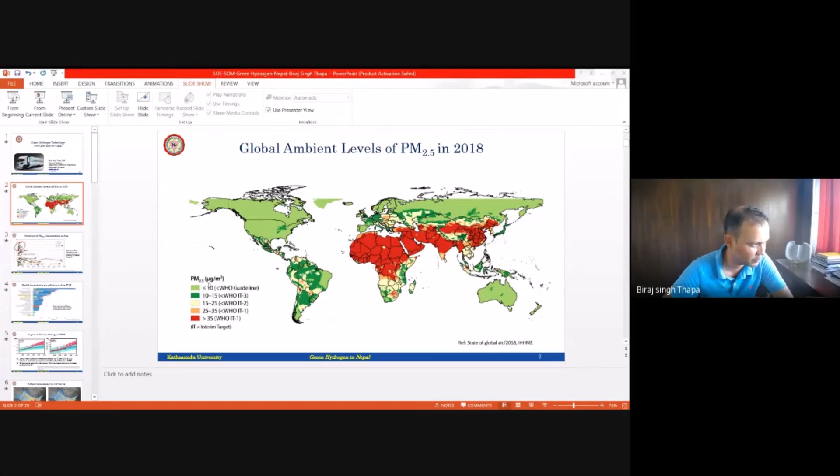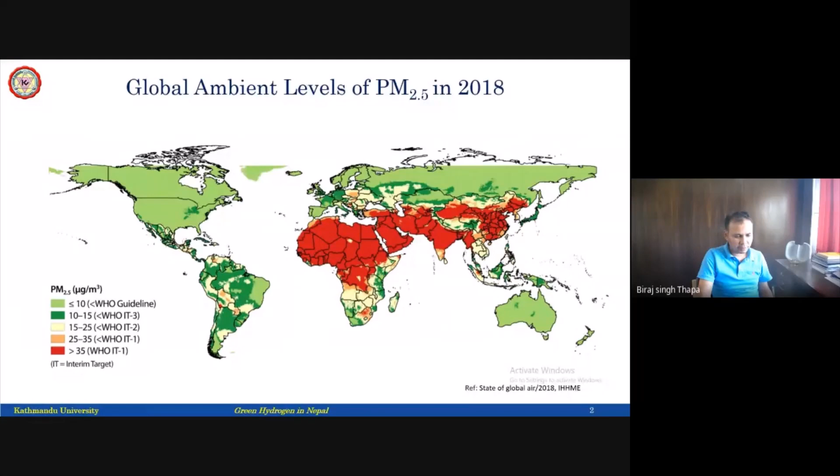That's what we want to dream of—fresh, clean air. If not for us, then the generation behind us should have green everywhere. That's why we see hydrogen as a future energy source, where we can see the entire globe green in this picture. That's the dream of my generation, to have everything in this picture green. That's why we call green hydrogen one of the sources.

We are neighbors, good neighbors, with so many things in common. We have very low GDP and very high particulate emissions. That is a really big challenge for our part of the world, producing bad energy. We produce quite high emissions compared to bigger or developed countries, and that's the reason we need to change the way we use energy, so our GDP can rise and our emissions can fall.

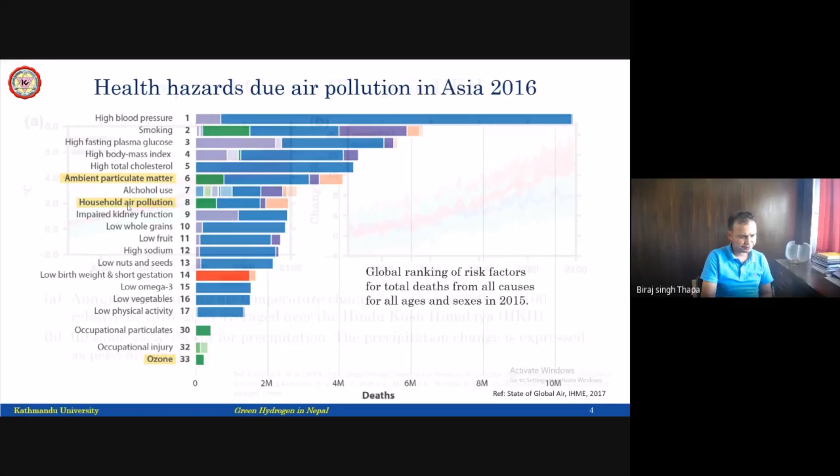This has brought quite a hazard in Asia. If you look at the reasons behind the deaths or mortalities, ambient particulate matter and household air pollution are quite high. So it reflects on our mortality, it reflects on our health system, and it also reflects on our climate.

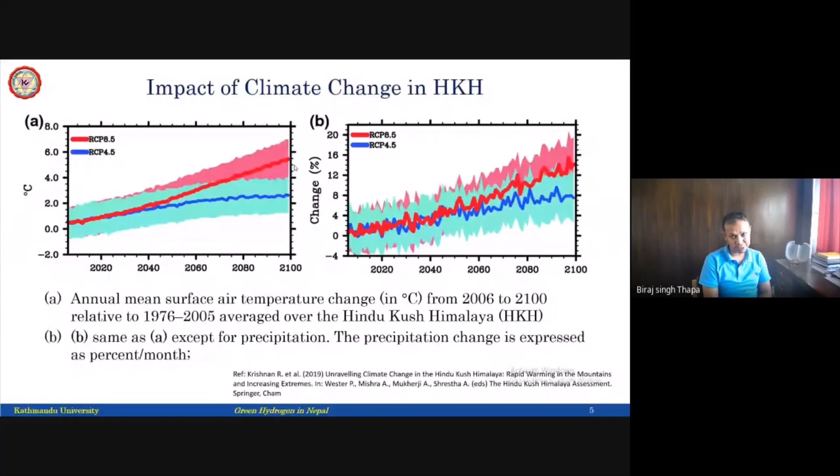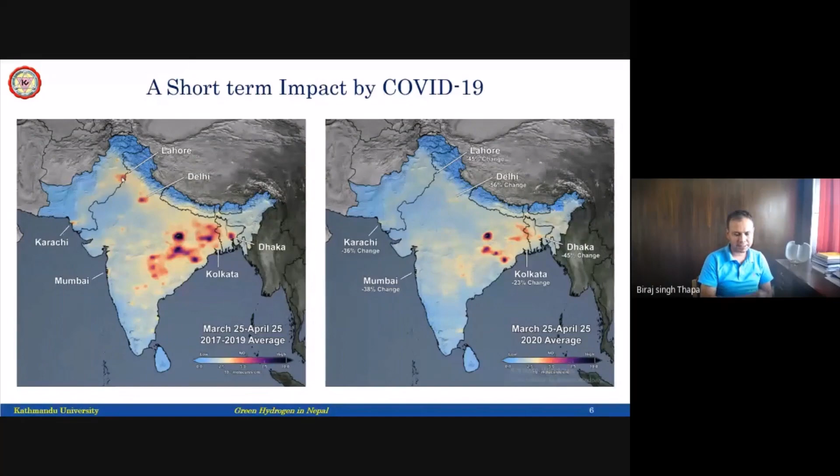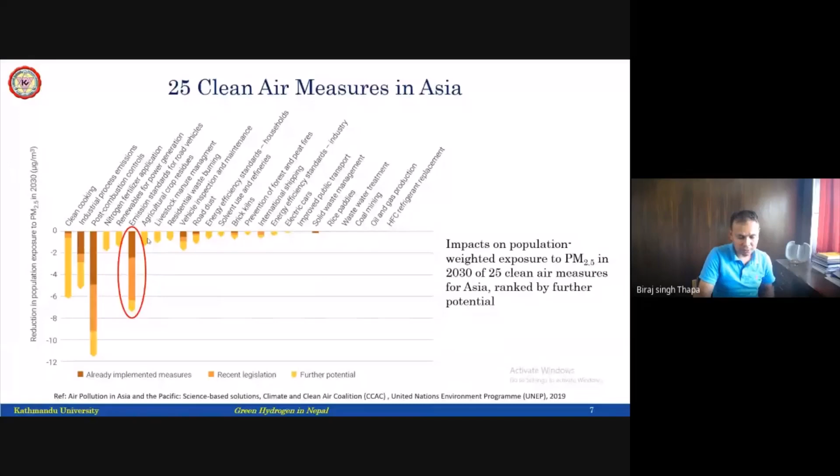And that is possible. In Nepal as of now, we can count the number of electric vehicles - that's 5 or 10, less than 50 on the roads. So if we change these patterns, the way we use road vehicles and produce emissions, that could have a very big impact on the environment, and of course reflects on climate change and other things.

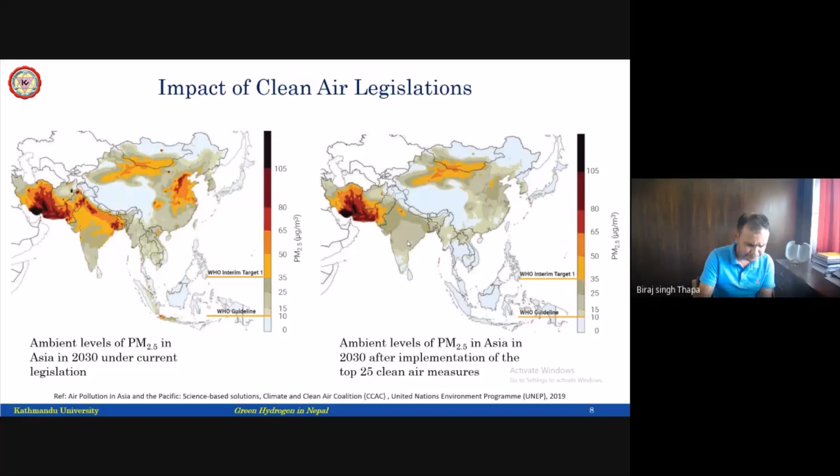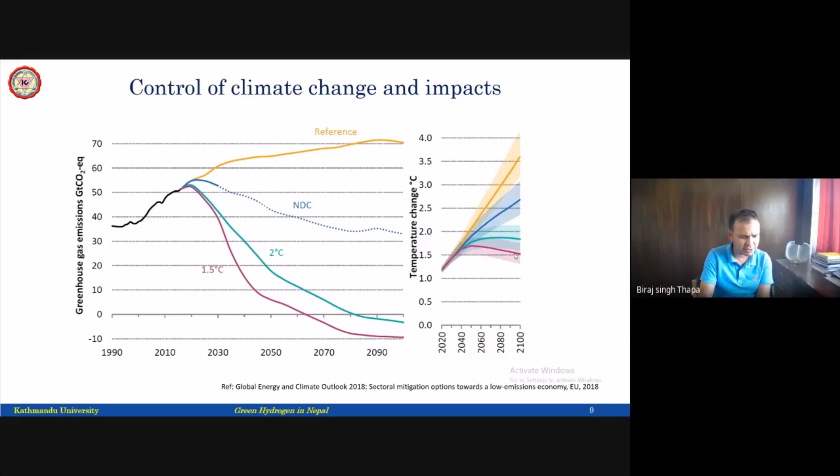All these patterns of climate change or control over climate change have been related to the energy patterns that we use. So many studies have been done - it is needed, it is necessary. It forecasts that if COVID does not impact this, the GDP is expected to rise quite sharply.

That means the purchasing capacity of each human being will increase. That means the amount of money we can use for purchasing energy could be higher than what we use right now, and that additional money for purchasing high quality energy for protecting the environment is possible because GDP is rising up. If you can buy high value clothes, we can buy high value fuels as well. There have been studies to see how this can be achieved - if we want to control temperatures below 2 degrees Celsius by 2100, this would be the energy mix. It's clear.

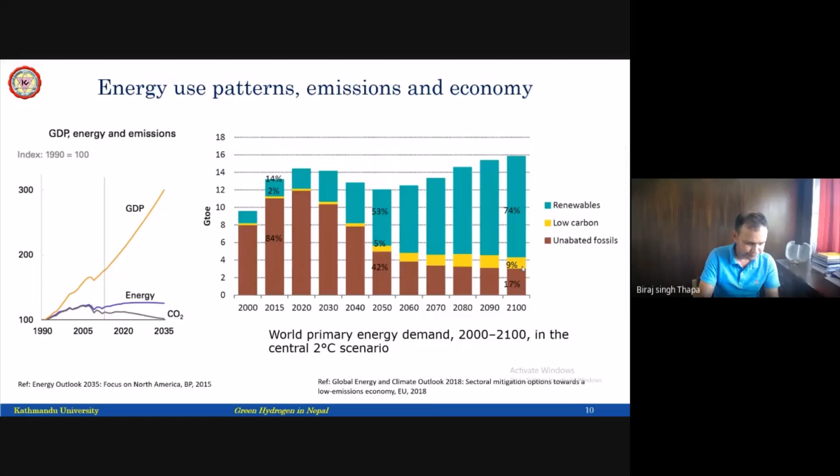And that's why we say green hydrogen can take up a big share of these renewables. So let me enter the second part: where do we find green hydrogen contributing towards a low carbon society?

Hydrogen is an energy carrier. This process was found by William Grove in 1838. It's quite an old technology. It's not rocket science at all. It's a very, very old and forgotten technology.

What we do is we just break water into hydrogen and oxygen ions by applying electricity. That's half the reaction, what we call electrolysis. Then we carry the hydrogen and put it back into the fuel cell, where it mixes with oxygen and produces water again. So it's just like breaking water into hydrogen, and producing water by combining with oxygen. Breaking water needs electricity, and producing water will produce electricity. So hydrogen is basically storing electrical energy in a very dense form.

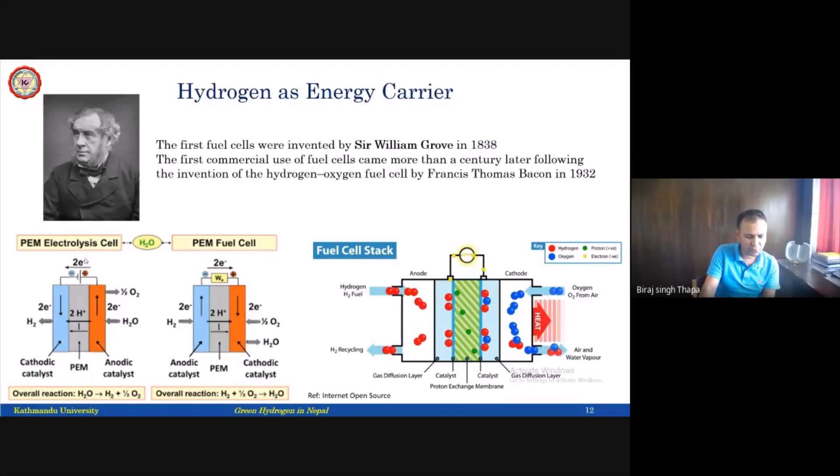So this is just a chemical reaction, it's all behind the chemical reaction. But the challenges are, how do we produce it efficiently? How do we store it efficiently? That has been our recent challenge, but it's an old technology.

As of now, it's of course solar energy that produces hydrogen. It can be directly produced from heat by thermolysis, and mostly from mechanical energy by heat, or directly from fluid energy by hydraulic machines. We produce electricity, and electricity can be produced from solar panels, and we do electrolysis to produce hydrogen. Hydrogen can also be produced from biomass by pyrolysis and other methods, and also from photolysis—there are several pathways. I think for Nepal, hydrogen production through electricity, maybe from solar or from hydropower, can be a sustainable path.

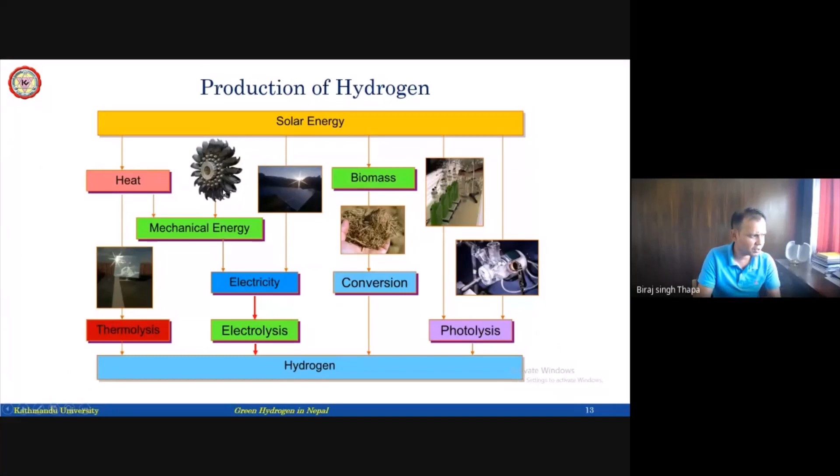There are a lot of technical aspects, though it was developed a long time ago. This is a kind of block diagram—I don't want to bring you into the technical aspects, but there are so many steps. We need to produce electricity first, then we need to break water into hydrogen and oxygen.

We need to store it, we need to transfer it, and we need to put it back again into the fuel cells to produce electricity again. So that's a very complicated process with overall efficiency issues. The total average efficiency for the whole cycle is not more than 60%. There is a lot of research being conducted, aiming to cross 80% efficiency. But the argument is, if fossil fuel can run with 30% efficiency, why can't hydrogen run with 60% efficiency?

Storage is another problem—we need 300 bars, which is extremely high pressure, not a common pressure at all. So that's a challenge, how to store it at that high pressure. It's very light, it leaks, it is inflammable. We have safety issues, a lot of cost parameters around it, and the technology is not completely mature. So it's still under process, and the main problem is adaptability.

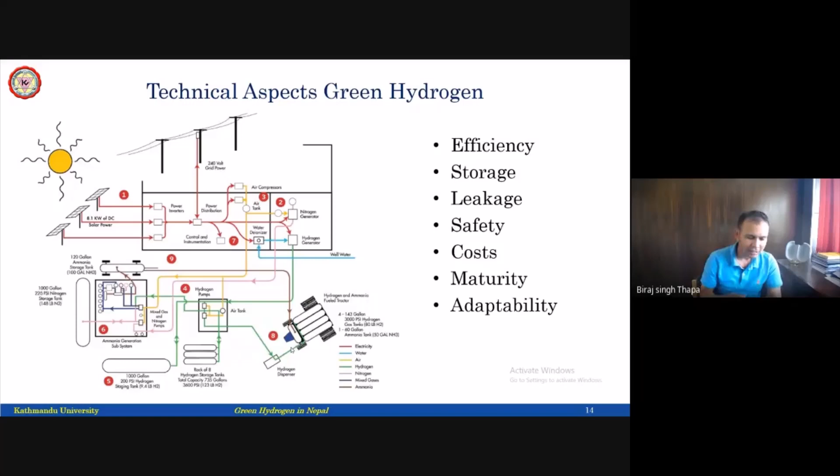Can we change our mindset from fossil fuels—what we call an easy fuel, even though it's dirty—to a clean fuel that is complicated and challenging? Maybe that's how the maturity of the society and the adaptability of this technology come hand in hand in the future. That's what we can expect.

And that's a huge thing when we compare vehicles, because carrying a battery means consuming more power. That's why we think in the future, small cars and small vehicles will still be battery-based electric vehicles. But for big buses, intercity transport, and trains, where batteries cannot drive them because of the low energy density, there is a very distinct gap where hydrogen can fuel it because of this high energy density.

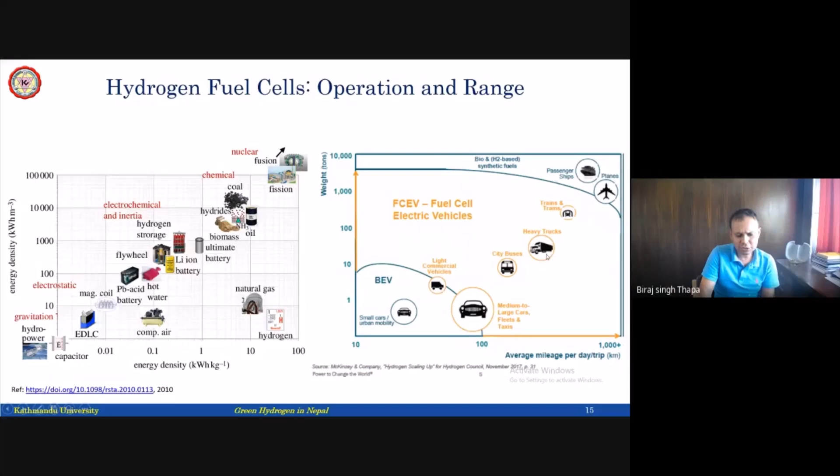We just need a few kilograms, 10 or 20 kilograms of hydrogen to drive from Kathmandu to, for example, Pokhara. That's quite high energy density. So that is the range where lots of research has been conducted, and that is where we can also focus in Nepal.

A lot of energy is consumed by city buses, trucks, and maybe in the future trains as well. If you look at the market right now in 2020, we have a very classical market for hydrogen. It's just a feedstock, meaning industries producing fertilizers or chemicals, only that.

So only the small scale or industrial scale hydrogen has demand, but it is changing. Lots of new industrial sectors are coming up, for example power generation. Transportation will be the largest consumer of hydrogen. Right now it's almost zero, but in future, transportation will be a very big sector for hydrogen. We'll also have industrial energy coming from hydrogen, and building energy coming from hydrogen. The industrial scale uses like urea production and chemical processing plants will remain the same.

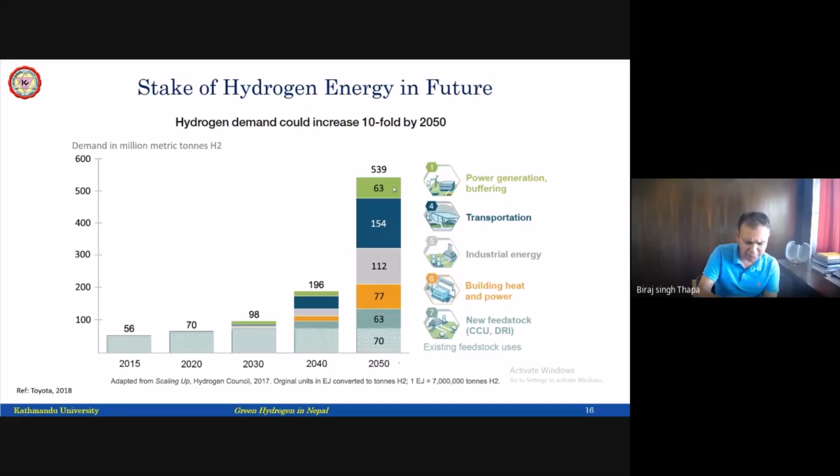So a lot of new things will happen. And if we bring hydrogen into the context of Nepal, all these things will start in Nepal as well. We will have a new ecosystem of transportation, and a new ecosystem for power generation and fueling. So that's the future. The entire world is moving towards hydrogen with this shift of society.

This year is very significant for hydrogen. We call 2020 the horizon, because from this year, the cost of hydrogen from renewables is entering the cost range of hydrogen produced from fossil fuels. Until now, even the cheapest hydrogen produced from renewable energy is still more expensive than fossil fuels. But from 2020-21, it will start to come down, even falling below. By year 2040, hydrogen produced from renewable energy will be cheaper than fossil fuels.

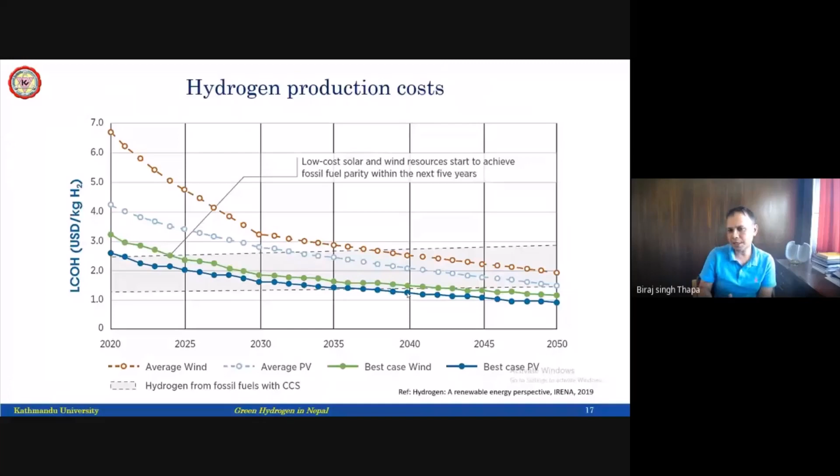And that is why we need that 10 or 20 year gap. We still have some time to prepare our society, because hydropower will remain for the next 200 years, for example. So if hydrogen becomes comparable to and cheaper than fossil fuels, this will definitely change the transportation sector, and definitely change the industrial sector. We need to start preparing from now in order to adopt this energy in the future. That's why we say this is the right time to discuss, the right time to start.

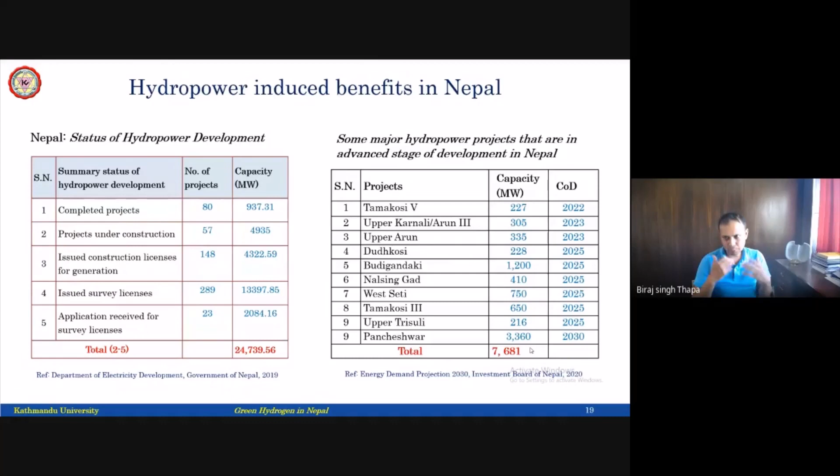If you look at the development of hydropower, Nepal's story has changed within the last 5 years, where we used to have 18 years of load shedding. Now we have surplus energy, and moreover 24,000 megawatts are under some stage of development, with almost 7,000 megawatts in the pipeline. We expect these projects to be completed by 2030, or late 2035 at most. So if the National Grid has more than 7,000 megawatts by 2030, we will have lots of energy surplus. There are many discussions on how to handle this surplus energy, but it's good that we have it — that is the motivation.

Recent data from the Investment Board shows that by the year 2030, the maximum power demand — including all new energy sources, converting all households to electric cooking, converting 30% of vehicles to electric vehicles, and all government measures to create demand — will saturate only 10,000 megawatts. But power production, if we go in high-speed mode, will be 18 gigawatts. So we can clearly see the projections. These studies show we will have 8 gigawatts of surplus energy by 2030 than what we need, and that's what we want to utilize.

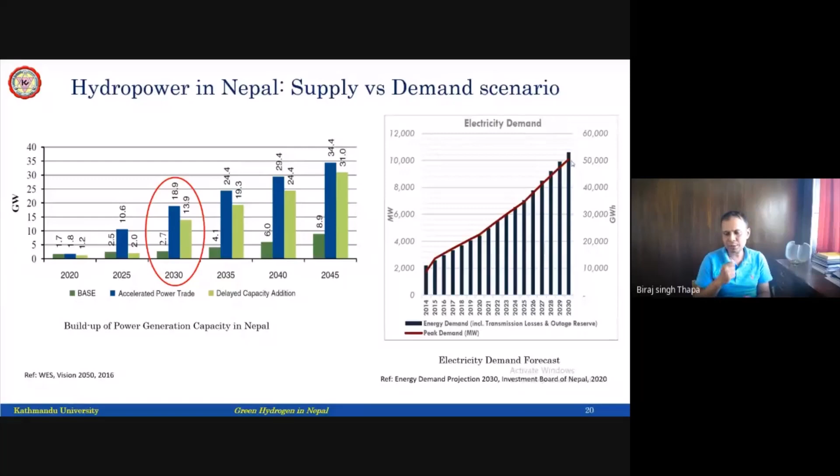And it will be too late if we start thinking about utilizing this energy in 2028, for example. We need to start thinking from now how to do that. Of course, the best example given is to export. There are so many things — MCC is in the parliament, and there are good numbers. It says we can have 3 billion USD per year by 2030 if we are able to sell all the surplus electricity to India, for example.

But there are so many issues. What happens if transmission lines are not there? What happens if you don't have quality and reliability in power? What happens when transmission lines fail? What happens if political issues rise up? What happens when the money for land acquisition is not available? So many uncertainties, but still there is hope that Nepal can export electricity, surplus power, and produce revenue. That's one good way of thinking, but there are other ways to do it as well.

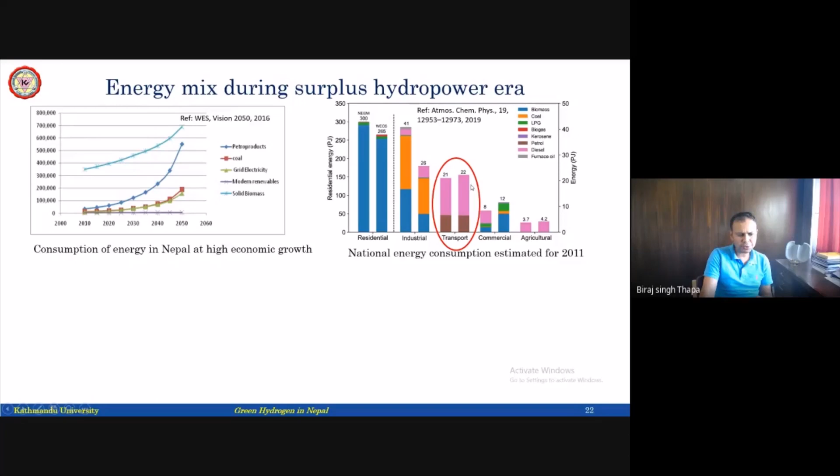If you look at the transport sector, it's diesel-dependent. So we'll be having high diesel consumption in future, and also coal. Looking at the energy consumption pattern for 2030, we'll have 7% diesel, and when we become rich, we'll have 18% diesel. Of course electricity will change from 3% to 32% because of cooking stoves and electric vehicles, but it's disappointing to see almost 3 times growth of diesel from 7% to 18% as Nepal goes from poor to rich.

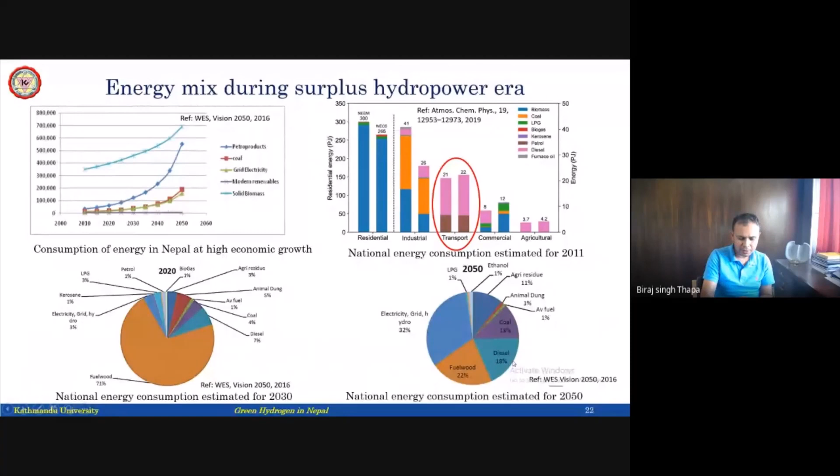So we find diesel is a commodity that cannot be replaced. We can replace petrol with electric, battery-based vehicles, but diesel is kind of the bad carbon footprint in Nepal. If you don't do anything right now, this will prevent sustainable development, because we need to depend on other countries for 18% of total energy consumed coming from diesel alone.

If you look at the current scenario, this is the most efficient power plant in Nepal, Khimti hydropower plant. It was so surprising - this gives 10 gigawatt hours of electricity to NEA every year. It's a rich power plant, it can give extra because it produces more than what's required in the PPA. But look at the small power plants.

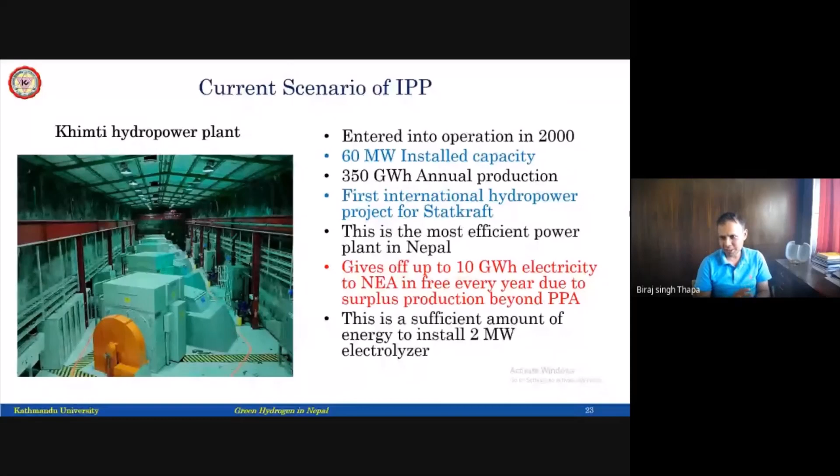And there is one issue - if we start to produce hydrogen from the excess energy, from the sick projects, I think that will be a sustainable method, and that is what we call the future direction.

If entrepreneurs in Nepal can establish a commercial biogas center where they compete with LPG, this can become an alternative to LPG fuels. Maybe in future,

the same companies can divert their business and produce hydrogen from hydropower surplus energy. Even Khimti is giving 10 gigawatt hours free to NEA. Small power projects cannot connect to the grid, and their electricity is almost free for now. So if we can use that electricity to produce hydrogen, bottle it like this, and sell it in the market, maybe fossil fuel trucks can be converted into fuel cell trucks in future. We know even Tata Motors have started investigating hydrogen trucks.

I don't want, in future, Tata trucks coming to Nepal from India with a hydrogen pipeline for the fuel cells. So before that happens, we need to at least try to create our own fuel that can replace fossil fuel in the future. There are examples, and of course the end uses are challenging. We can use this in transport, maybe less so for manufacturing, but this will have a very good impact on the electricity system.

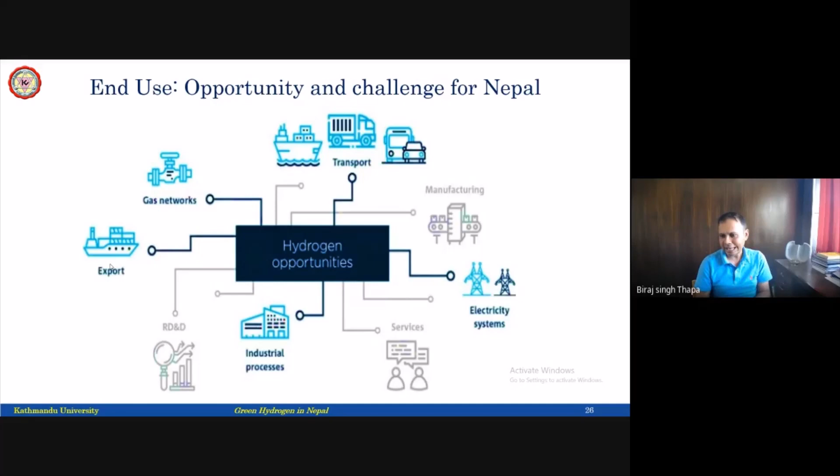Concluding this, as I said, this is just the technical part. We think there should be a roadmap. We should start from the feasibility study. We should have an assessment of technical, financial, environmental, and market aspects.

And market is more important for us. That's why School of Management is our partner today, to find out what can be done. The presentation after me can be on those issues.

So hydropower and other renewables, we need to start from somewhere: feasibility study, cost benefit analysis, social impacts, environmental impacts, all. We need to have capacity development. I think at present, me, Bola sir, and a few of us know what we are talking about.

We are trying to motivate others, reach far and wide, try to push people to make them understand what they can do. But that will not help. We need capacity, we need research facilities.

We need expertise in the local universities, so we can do research and development, and we can also contribute to knowledge management. Of course, we are not ready to do fundamental research, but technology transfer and local adaptation, that is our path.

And to support that path, there should be capacity in the university coming to the society. Then we think we need a pilot project, small or big, it doesn't matter, but that will complete all the steps from production to bottling to safety to transfer to retailing, all those smaller things, and create a complete business ecosystem, because this is a new commodity.

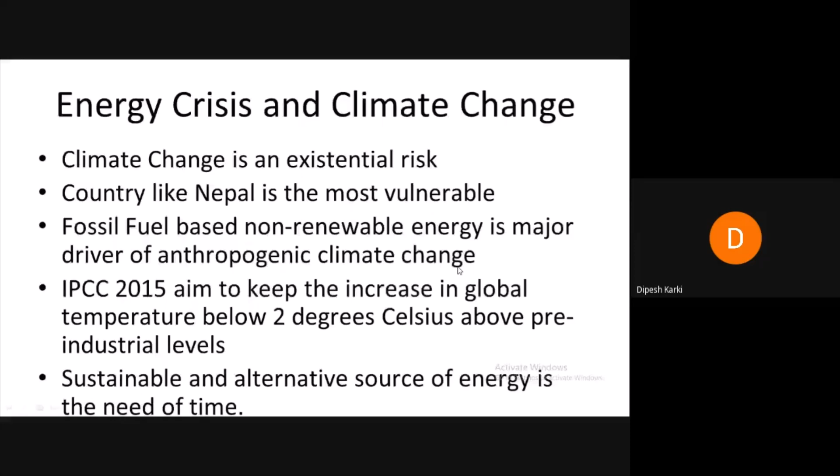So we are on the verge of a crisis - fuel crisis, climate crisis, you name it. But I would like to share a kind of cliche about the Chinese symbol for crisis, because we are in a kind of risk: the first character always signifies danger, while the second character always signifies opportunity. So we are here at this crossroad, between danger and opportunity.

If you look at the current context of Nepal, it is kind of very depressing, because we are too dependent on fossil fuel. Just last year, according to the International Trade Center's trade map, we imported almost 216 billion rupees worth of petroleum products from India. Now, one of the major problems we have with India in terms of trade is that our Nepalese currency is not directly convertible to the Indian currency.

For example, if you carry your Nepalese rupees to the cities of India, say Delhi, Mumbai, or Calcutta, and try to buy something using it, you cannot directly convert it into Indian currency. So what we need to do is buy Indian currency by paying with the dollar reserves that we have. And those dollar reserves, filled by the hard-earned money of our labor brothers and sisters working in the Gulf countries, are dwindling because we are consuming a large portion of it on fossil fuel. If we simply factor out the fossil fuel, the balance of trade with India will improve drastically.

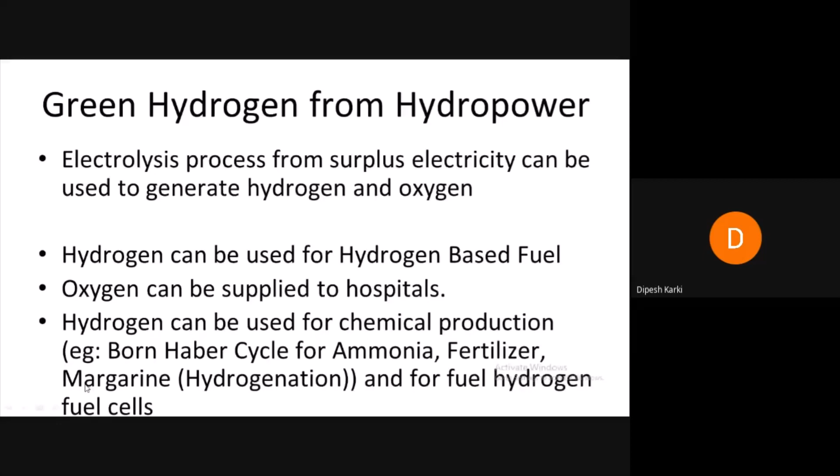So why hydrogen fuel cells? For example, right now in electric vehicles, there are two types coming into the market. One uses conventional batteries, like Tesla uses. The other one is the fuel cell electric vehicle, such as the Toyota Mirai.

The problem with the current electric vehicles in the market is that it takes a lot of time to charge the battery. It takes around 2 to 3 hours, and you need lots of charging stations. But hydrogen fuel can be refueled in a much faster time. Some estimates have said that in 3 minutes you can fill up the entire tank.

It is environmentally friendly because unlike the internal combustion engine, it doesn't produce smoke. Instead, it produces water as a byproduct. But now what are the challenges? We have this technology, so why are we not moving forward? That's the biggest question. The major reason is, of course, the lack of refueling infrastructure.

If you're owning a hydrogen fuel car, while traveling you need a place where you can easily refuel it. But right now there are very few refueling centers. Even in California, there are only about 40 refueling centers. So it hasn't scaled up that much. This is a classic chicken-or-egg conundrum that most new technologies and new businesses suffer from.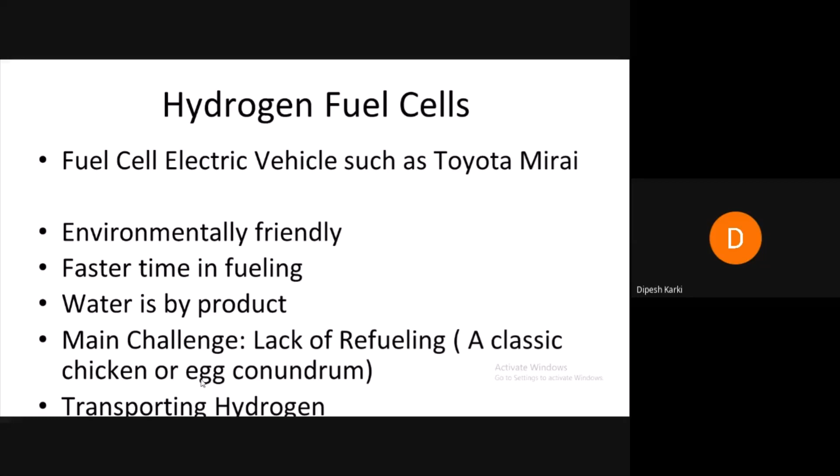So now let me discuss a little bit about what can be done, what are the potentials. Whenever we talk about new technology, especially in a country like ours, we always talk about foreign aid. Foreign aid can be there because we're talking about a technology that can help mitigate climate change.

So this hydrogen-based economy, from the climate finance perspective, can be considered as a climate mitigation strategy. Climate finance always has these two components: mitigation and adaptation. Mitigation means we try to reduce our carbon footprint, while adaptation means we try to cope with the changing environment and change our behavior. So basically, since this hydrogen-based economy tries to replace internal combustion engine technology, climate mitigation strategy is the right approach.

Now, according to the United Nations Framework Convention, there is a public-private financing mechanism that can be applied for climate mitigation and climate adaptation. There is a fund available for that. Recent research done by Buchner in 2019 shows that almost $546 billion in 2018 was spent on developing this kind of climate resilient, sustainable projects. But it's still short by 1.6 to 3.8 trillion US dollars.

So why is this important? Because whenever we are discussing a project or product that mitigates climate change, we always talk about something called global public good. Public good, as we know, is non-excludable and non-rivalrous in nature, but global public good is a bit different because it has a larger geographic coverage. For example, if you reduce carbon footprint here in Nepal, it will have an impact on the entire globe.

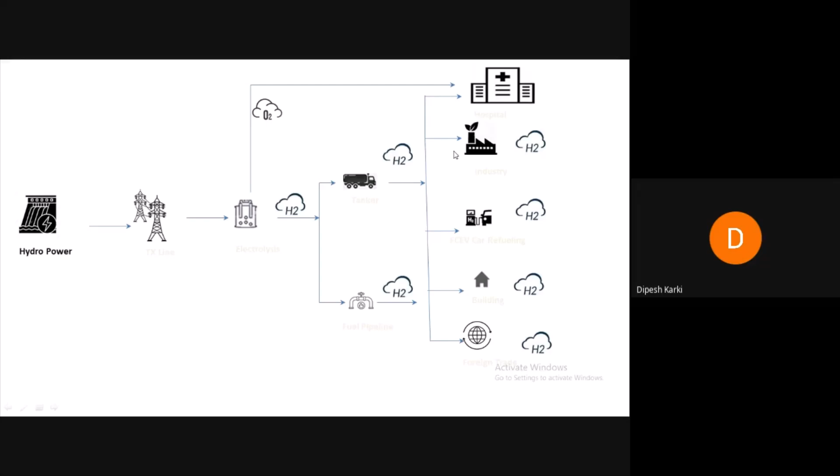So now I'd like to touch upon a little bit about what the role of the School of Management is trying to do in this particular thing. One of the things is, of course, the market potential of the hydrogen product.

Determining a market potential of something that is not there yet, we cannot use revealed preference techniques to gauge the market potential. Here we have to resort to something called discrete choice experiments, so we can do research to determine the market potential and see where the market can be in the next 10 years. Otherwise, everything will be speculation.

The other thing is the project feasibility itself. Right now we generally use the net present value method, the discounting valuation methods, in our conventional projects. But we can apply something called real option analysis, which is much more suitable for determining the cost benefits and financial projections of green hydrogen projects.

The other thing is that whenever there is value, people are willing to pay the price. So how are you going to determine how much price the consumers are willing to pay, how much the industry is willing to pay, or how much our foreign partners are willing to pay for the hydrogen? We can run something called contingent valuation methods and do research on willingness to pay as well.